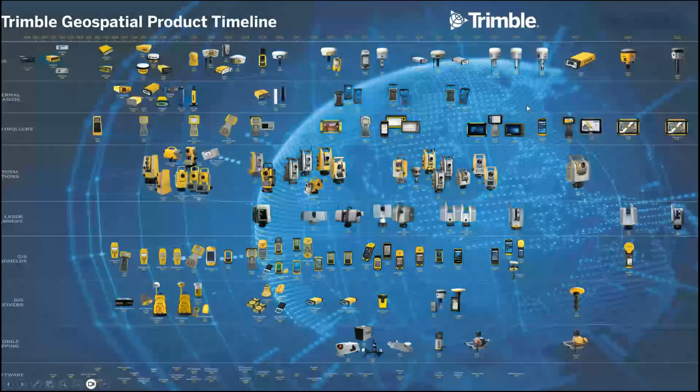This is what the Trimble Geospatial product timeline looks like for the last four decades. It's actually 30 years in 2024 since Trimble released the first commercially available RTK receiver back in 1994 - it was 5Hz at the time. In the last 5 years, Trimble has continuously developed and released new hardware at the rate of almost literally one a year, accompanied by field controllers and other bits not GNSS related. So it's quite a long history of development, knowledge, and experience in this space.

I thought it would be a good idea, because sometimes I get customers just accepting the button-pressing operation of basically every bit of surveying technology, not really understanding what's going on in the background. So apologies if some of you are well versed with the theory behind it - for those who are not, allow me 60 seconds to go over this.

What is GNSS? It's an acronym for Global Navigation Satellite System, which effectively comprises 6 independent constellations managed by different countries, or in the case of Galileo, a union of countries.

Why does it matter? When I first started this 25 years ago, we only had GPS to work with - they had about 21 satellites at the time. At any given point during the day, I'd have access to 5, 6, maybe 7 satellites with any luck. It was difficult to measure points even in easy conditions. But we need a lot of satellites to measure more points so we can triangulate our position better, which is why we now have basically 4 times the amount of satellites we had 20 years ago. So at any given point in time, you'll have 20-plus satellites to work from across different constellations.

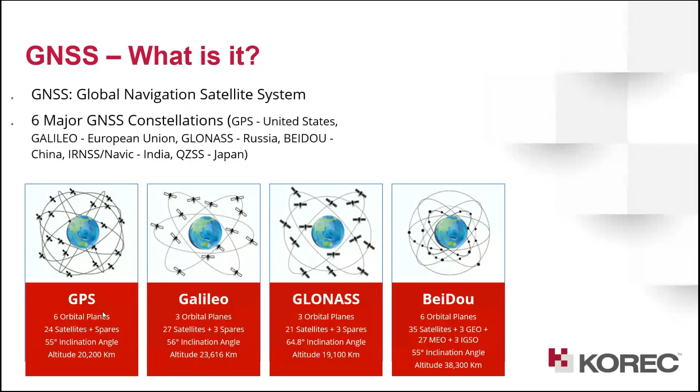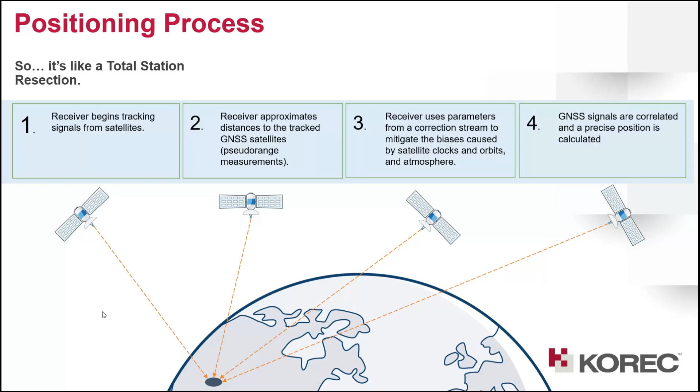How does the positioning process work? For you to figure out your position anywhere on the planet with what we call in the industry autonomous precision - accuracy anywhere between 3 to 10 meters - we get signals from the sky. I like to explain this in total station terms, since a lot of people are more familiar with that. So it's like a total station resection - I used to call this trilateration - but where the baselines are actually in the tens of thousands of kilometers to your satellites, and the control points, i.e...

The satellites are moving at thousands of miles per hour, and it's still very much impressive that with all of this, we're able to get, with no additional help, an autonomous position with an error of just a few meters anywhere on the planet.

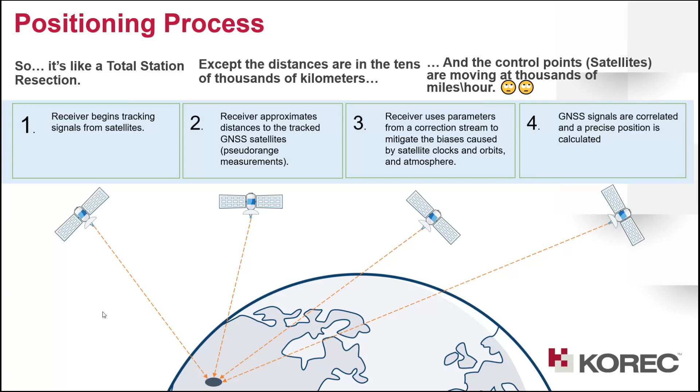If we want better, essentially what we have to do is pick a known, fixed point in space, which we'll call a base. That base will have an error to the autonomous positions, and we'll differentiate that error to the rover, which we call our corrections. Those corrections, in the case of a base and rover system, which we call traditionally RTK, are then transmitted by radio to a rover to enable you to get centimeter level accuracy.

Trimble VRS is a positioning process concept based off RTCM, a worldwide standard, which is how you get those corrections. I'm not going to get into the mathematics about it. By the way, spoiler alert, we're planning to do another webinar purely focusing on the mathematics and the whys of VRS and other bits and bobs in a couple of months directly with Trimble, so we can drill in a bit more on these specs and technicalities.

But for now, RTK on a real-time network means you get your corrections from a network by mobile internet signal. VRS is a technology that Trimble has acquired and has been continuously developing since 1998, so it has almost 30 years of development into it.

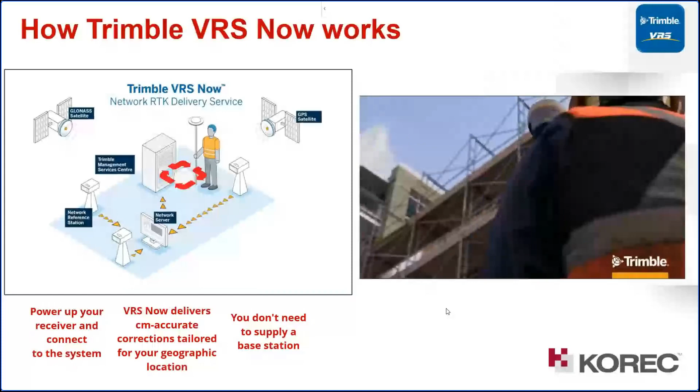Virtual Reference Station Technology, or VRS, pioneered by Trimble over two decades ago, remains a proven, cost-effective choice for any real-time GNSS survey application. Trimble VRS Now Correction Service provides surveyors with the power to just connect, correct, and measure, all with the peace of mind of around-the-clock network monitoring, always delivering the reliability your work demands. With continuously evolving global constellation systems, we have more satellites available for your real-time correction stream than ever before. Using the newest constellations gives you increased reliability and more robust service. With Trimble VRS Now Correction Service, buildings, trees, even hills are less of a challenge, resulting in more robust, accurate data and less vertical error. Trimble VRS Now is a network RTK service that eliminates the need to set up your own base station, simplifying job site logistics and eliminating capital expenses. You get the job done quickly, the first time and every time. Let Trimble VRS Now harness the power of satellites to give you the real-time precision you need. Less setup, more time measuring, and the around-the-clock peace of mind that Trimble is monitoring the network so you have real-time data always. Accurate, dependable, easy. That is Trimble VRS Now.

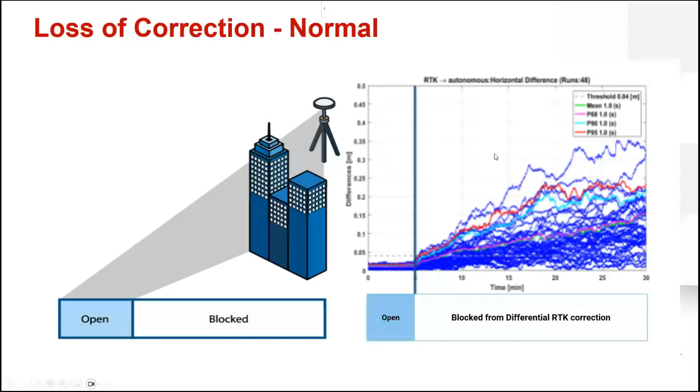If you have access to this precise positioning service, which we call xFill in the Trimble gear, the software on the controllers will automatically switch to this correction service, and there are two flavors in which it will happen. I'll circle back to that, but it was developed so that you have positioning insurance against drop downs in your mobile internet. It will carry on with the same level of accuracy as VRS up to a point, then degrade a bit, but there's a limit to how it will degrade, and it will still maintain what I call an RTK level of correction.

The xFill correction service comes in two separate flavors. One is limited to 5 minutes: whenever your base station correction by radio or VRS connection by mobile internet drops, it will automatically flip to xFill for up to 5 minutes, and you'll see that happening on screen. When the correction goes down entirely, you'll see it drop. The other version is always on, so it doesn't matter how long you go without internet, the system will be continuously on.

Why is that important? Basically because it avoids downtime. It gives you extra time to measure a few additional points where you don't have to bring out the total station, or if you do need to, it gives you enough time to measure those resection points.

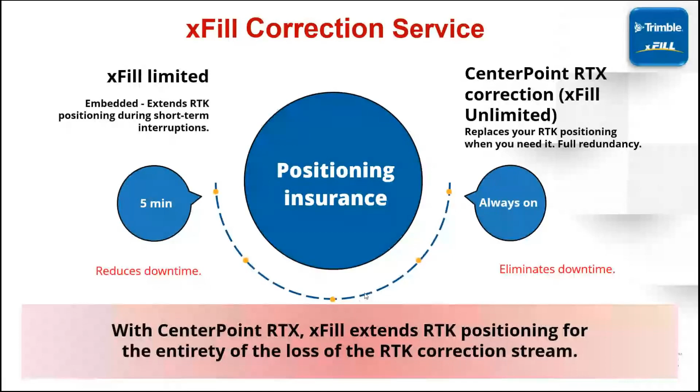We've been speaking with more customers about this feature and learned two things. A lot of our customers were already using this xFill Limited service without knowing. But when we brought it to their attention, they said this is saving us a lot of time, because every time we have to take a total station out, that's like half an hour of our day gone. Using this technology, we don't have to spend that time getting the total station out.

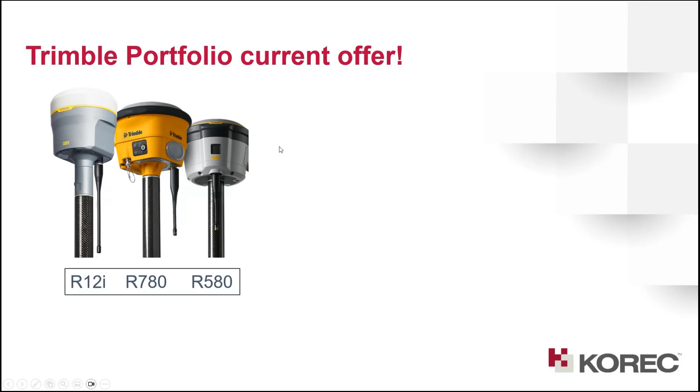The good news, and here's the first offer of the webinar: for our current GNSS portfolio, the 12i, the 780, and the 580, all of them have xFill Limited as standard for up to 5 minutes. So all your Trimble gear will automatically switch to satellite correction if the internet goes down, up to 5 minutes, and it's a permanent feature that will always work on Trimble gear. You don't have to pay extra - it's included as part of the standard offer.

For our VRS users, anyone using our VRS subscription, whether a new subscription or renewal, you can have at no extra cost the unlimited version - it will not be restricted by the 5 minute limitation, if that makes sense. Even if you want just a trial of this independently, give us a shout, we'll sort it out. I'll reiterate, this will only work with Trimble gear, this xFill service.

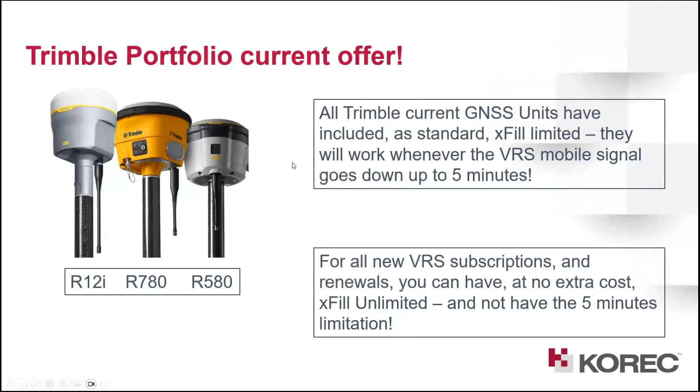Expected accuracies - I'm not going to read the slide, you guys can take a screenshot or watch the recording afterwards, but we always like to check what we get against what's on the data sheet. We know from experience that VRS Now is at this level of accuracy, whereas xFill, the time limited stuff, is as accurate in terms of horizontal values. Vertical is still not quite as good as VRS Now or radio, but in terms of product development, this used to be 10-15 years ago, 10, 15 centimeters horizontal, 30 centimeters vertical - the best we could get.

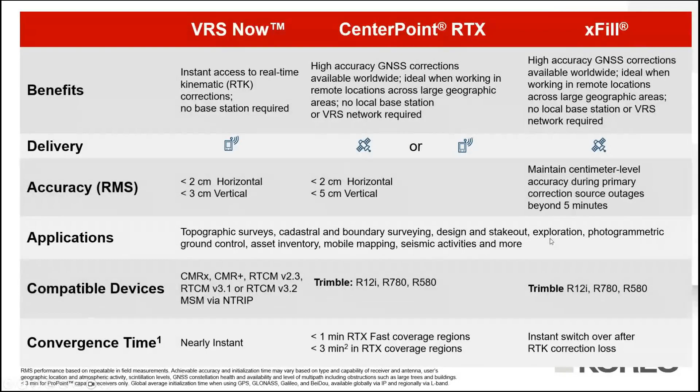Like any other network, this positioning service is based on a worldwide network of receivers. The more receivers Trimble installs over time, the lower these numbers will be, and this is what we've been seeing across the planet. If you have that RTX service in your systems, you can work anywhere on the planet where you have coverage through one of those satellites broadcasting corrections. Yes, there is a way to get to higher latitudes using a different way of connecting to RTX - I'm not going to jump into that now, but if you want me to explain it, I'll happily go through the 101 with you. It's a worldwide service with over 20 years of development, and it's getting better over time.

This might be familiar for you Trimble users - on the R12i controller, whenever it flips between RTK on VRS and xFill, it changes the information you see on screen. This is a simulation, so if this video was taken from a real controller, clicking the world icon and hitting pause effectively cuts off your internet connection.

If you give it a few seconds, you'll see that it flips to RTK xFill, and you can see that it's still maintaining the same level of accuracy. As I said, as standard, all Trimble gear on the latest portfolio will keep this connection going up to 5 minutes, up until which point it will give up, or if you get your internet back, it will resume, which is what we'll do here on the video. So we're going to get the internet connection back up, and you'll see that the icon will change back to the world with the green tick again.

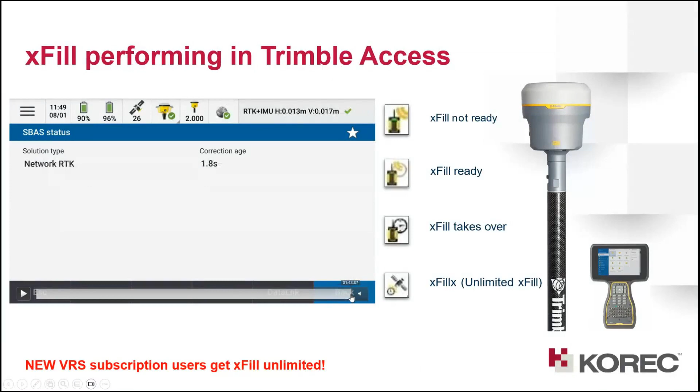You have the satellites, and a few more seconds. I'm going to push this forward. 3, 2, 1, and RTK plus IMU was the last bit. Okay, so world with the green tick.

So the software in the field will inform you on that. We never do anything - you know, I'm old enough to check everything, so I don't really trust implicitly what the controller says, and I know that you guys don't either. So we always check whether what the controller says is actually based on truth or not in reality.

This was actually recently. I've asked one of our specialists, Phil McCartan, to do a couple of screenshots from this controller on the fly. Nothing really professional here in terms of picture taking, but what he did was he resected the total station from a few GNSS points. He measured a couple of points with the total station, then flipped to this precise positioning service, RTX, and staked out that total station measured point. You can see that the vertical accuracy is 30 mil, but then it's saying that the real vertical is 43, which kind of goes in line with that 5 centimeter absolute accuracy that was stated in the service. But the horizontal accuracy is pretty much bang on where it should be. So I'm happy with that.

He did the same, now measured against a VRS measured point without the IMU, without the tilt function on. That is the simplest way of comparing, and yeah, this is very acceptable to me.

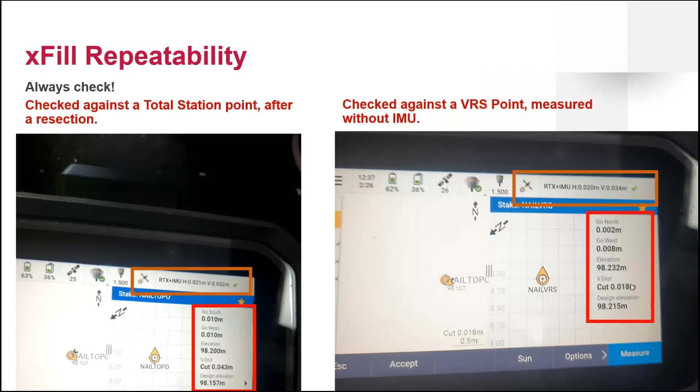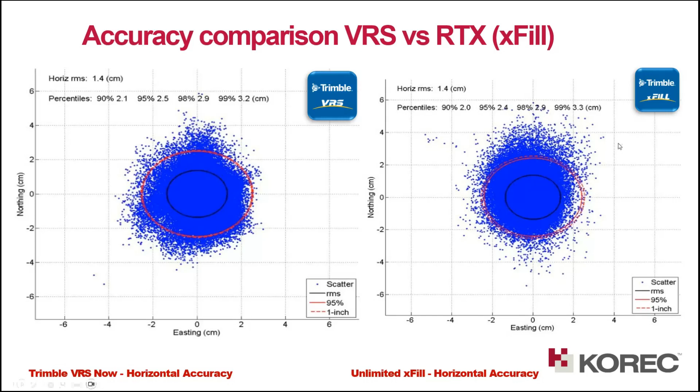Hopefully that makes sense. If there are any questions or whatnot, just throw them in the chat window. Trimble tests these technologies over and over again - that's a dispersion of points, of hundreds of points measured between both systems, VRS and xFill, just to prove that the horizontal accuracy is essentially the same up till that 5 minute mark. You guys will be fine using the service. Vertical will degrade a bit more after those 5 minutes.

You might remember from my previous webinar about laser scanning - this is what a Trimble laser scanner used to look like 20 years ago: heavy, convoluted, targets, cables, batteries, all sorts of things that you have to bring with you to site. But again, through miniaturization and increasing processing capabilities, everything is much simpler and faster now, and everything is contained in a really high powerful tablet that you bring with you to site. So this changed the way that people work and enabled a lot more people to access the laser scanning technology.

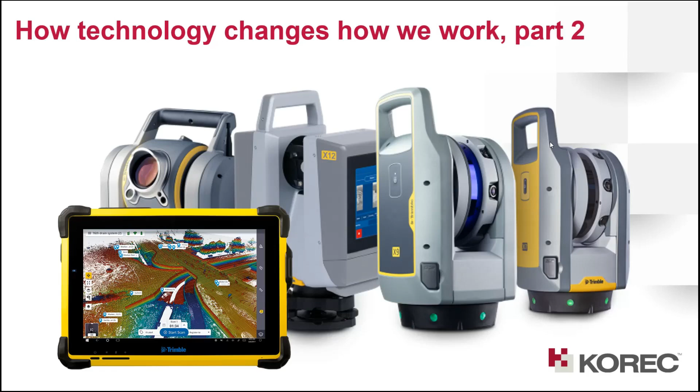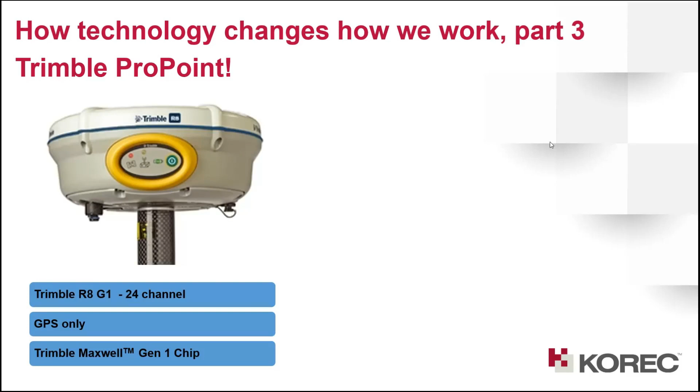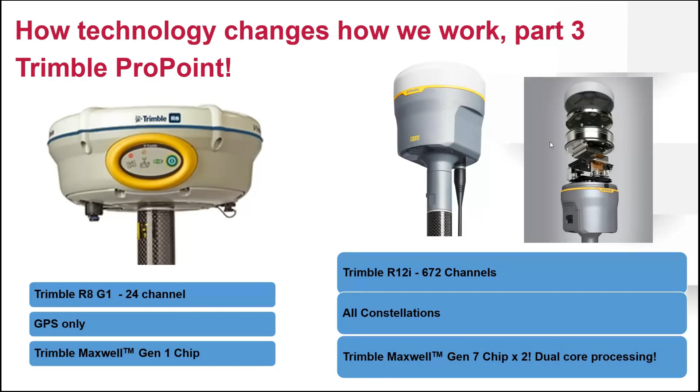Trimble ProPoint is our trademark technology on our GNSS kit, which essentially did the same. I remember when I started working, Trimble had an R8 first generation. There were only 24 channels there, it was only tracking the American constellation, and we were up to the first generation of the processor on board, the Trimble Maxwell chip. Whereas now with the R12i, we have two 7th generation Maxwell chips, which enables the R12i to have dual core processing, which, like a computer, enables the system to compute mathematics much faster and much more reliably. And we're able to track all 4 constellations as a standard on that unit.

What am I going to do? Well, we know what we will do. We will figure out a way with a total station or what have you. But it was always kind of disheartening. Whereas now, through the improvements of technology and how Trimble is able to filter out signals and compute best mathematics and increasing processing power, which is the hardware improvements in the actual unit itself, we're able to sort those

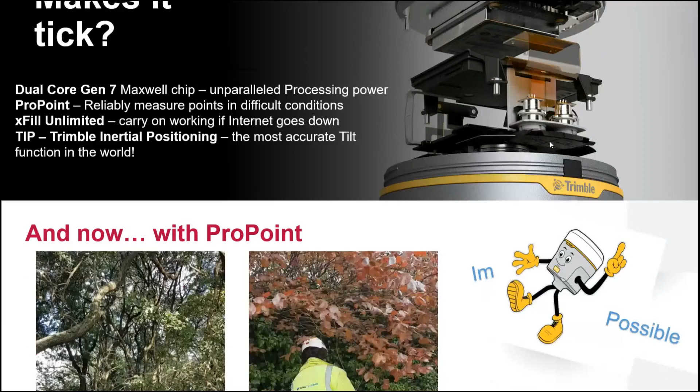difficult measurements on the canopy or buildings a lot better. And including all of that technology, combining the sensor fusion within the R12i, with the ProPoint, with the xFill, with the tilting technology, we're able to do stuff like this, where you can get underneath a canopy and get real proper accuracies underneath it.

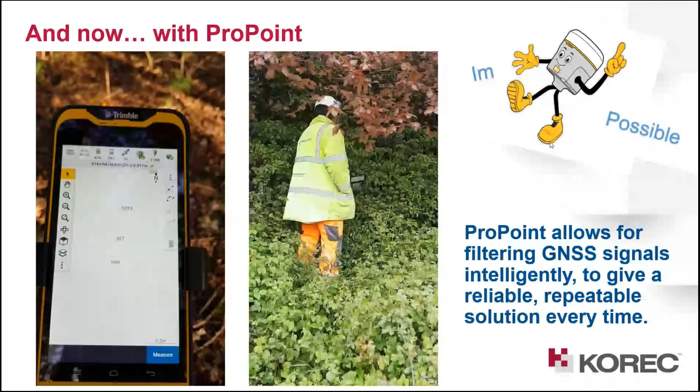It's not just about, for me, the ability to measure things on the canopy, it's that if you take the system out of that canopy and go back again and take that point, you're going to get the same result. Repeatability is paramount for Trimble. Repeatability, reliability, these are the cornerstones, the foundations upon which Trimble GNSS has been built over the course of the last forty years, basically making the impossible possible.

So you can get out of sight now, laughing with a smile on your face. I have a feeling this slide will become a meme at some point.

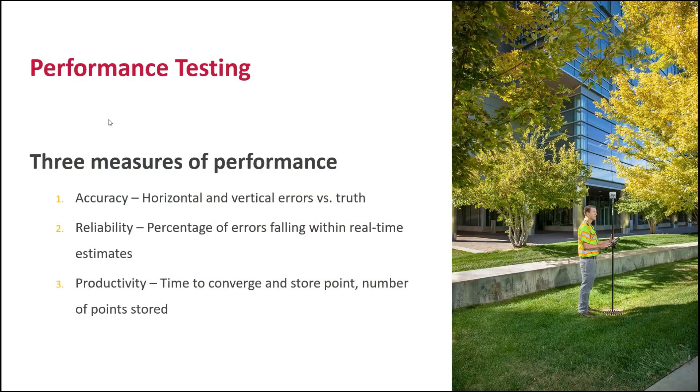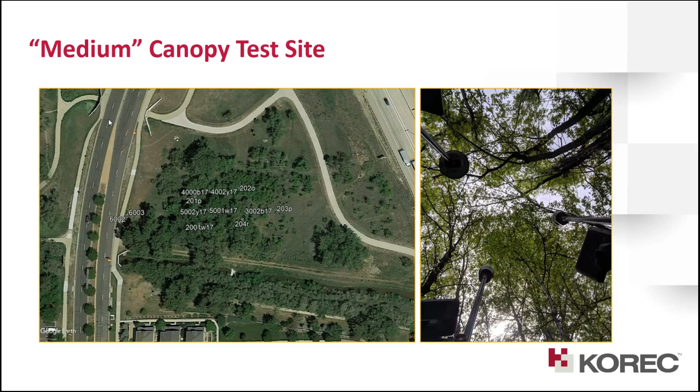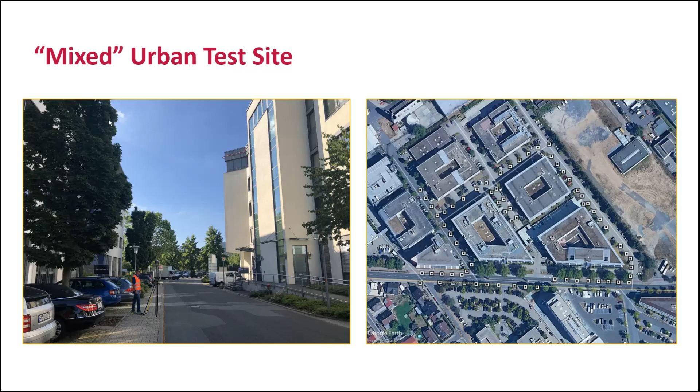As I said, testing is what makes customers trust Trimble GNSS. So this is just a few slides to explain that before the ProPoint technology was officially released to the market, this is only a very small fraction of the tests that Trimble did with the system in different sorts of conditions - canopy, partial. I'm going to skim through these slides just to say, yeah, mimic different situations, different conditions to test things other than being able to measure a point underneath canopy or close to buildings.

So this is the value in ProPoint, making sure your topo surveys or control points measured are correct. If you want to have a look, I have another 20 different slides just with the rest of the results from those tests, which I'll happily share if you reach out to me afterwards.

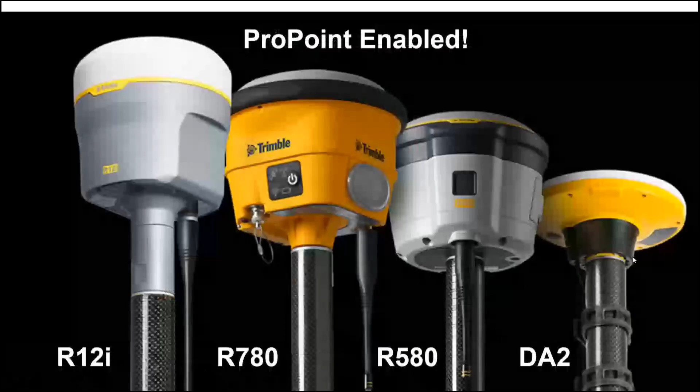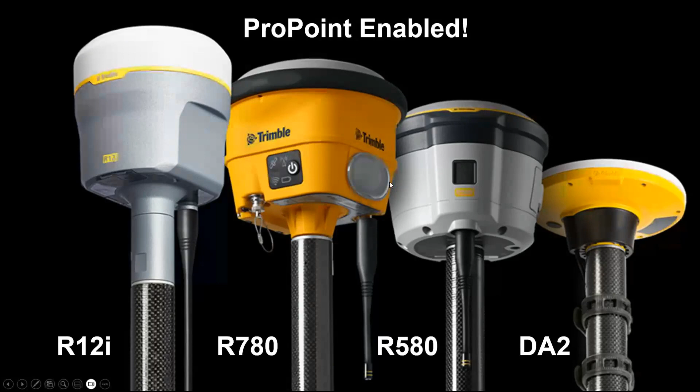So all of our current portfolio is ProPoint enabled. All of them have that technology. They will all work essentially the same. For the discerning eye, you'll notice that the R12i will be a bit more accurate and a bit faster because of the dual processor, the dual Maxwell chip that it has on board. The other ones have just one chip. I say just the one - they're still pretty great. I know we're talking about improvements of 2, 3, 4 mil every now and then that you'll notice on your measurements.

So yeah, this is the main part of the portfolio. The R12i is what we call our premium solution, the all-in, all bells and whistles option. There's no options on the R12i - you'll get it with standard, all constellations, base and rover ready to broadcast, tilting technology all ready to go. Whereas the other ones - this one is scalable, and the 780 is a scalable unit, I'll tell you about the options in a second. And the 580 is what I call the best value, the one with the best return on investment, meaning if you invest in it you're able to get your return a lot faster.

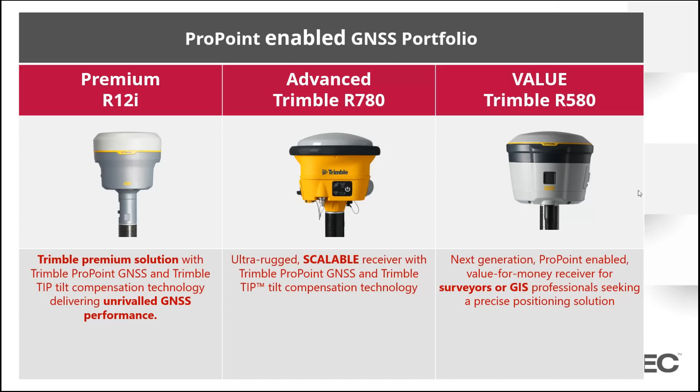And it's the one that we, as KOREC, also sell for both the survey and GIS market, because it's able to cope with different controllers for survey and for GIS, and with different software as well, things like TerraFlex or Esri or our own K-Matic software on controllers.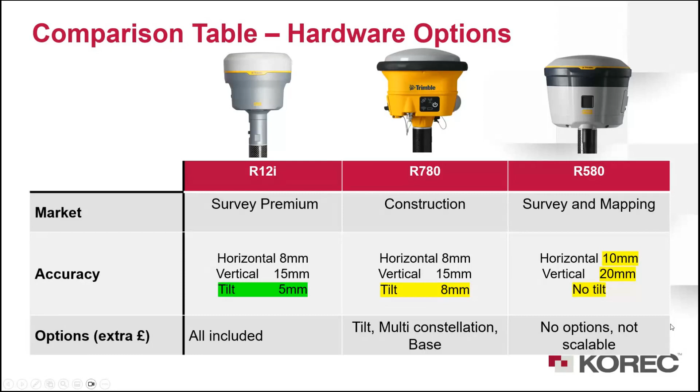If you remember this, yes, people were really serious about software should make their own hardware, and Trimble does so for the GNSS as well and for the controllers. Why? At the risk of repeating myself, it's the same reason Trimble makes their own hardware for laser scanners: to make sure the communications work properly - the Wi-Fi, the Bluetooth, the software on the controller which Trimble also develops - to avoid things like data corruption and downtime, waiting for the Bluetooth connection to kick in or resume, or when you're trying to switch between total station and GNSS, it takes time.

Sometimes it doesn't work, you have to restart things. Trimble doesn't do any of that, for almost 20 years. I cannot remember the last time I had a Bluetooth problem with any Trimble kit. It just works, which is probably the main thing any Trimble GNSS user anywhere on the planet will comment when asked what they think about Trimble GNSS.

That's always, without fail, the first tagline. Speaking of controllers, there's a huge legacy of field controllers in Trimble - developed and supported by Trimble. This is already out of date, this picture is already out of date by 3 years, because after this there was already a new version of the TSC7 released in 2023. Looks the same, but has a different processor, more memory, more powerful. So yeah, just keep on updating all of these controllers, and this is just the ones that have a keyboard on them - I'm not counting the tablets and the ones that don't have a keyboard.

Continuous development - why? This is the latest version of the controllers that we sell here for total stations or GNSS. Why is Trimble continuously updating their controllers? Well, one, because it's just the way to give back to the market something that's up to date. And secondly, so that when you invest in one of these controllers, they last you for the whole lifetime of the product without you feeling that things are getting slow over time, or that it's getting outdated over time.

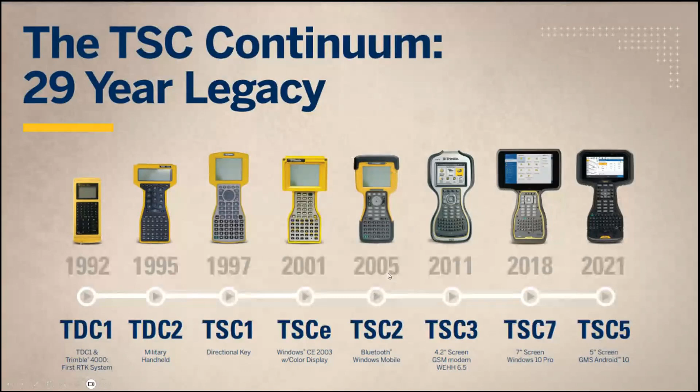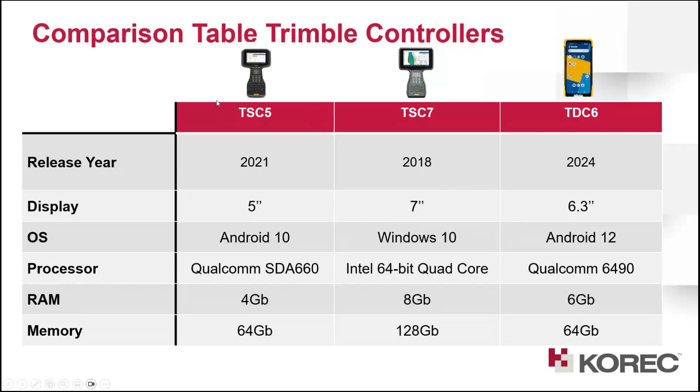Don't limit yourselves to controllers which have not been updated in the last 5, 6, 7, 8, 9, 10 years. Go with something that works, Android-based. There's nothing else like that anywhere on the planet for a controller supporting Android.

Also, if you're in the construction space... apologies, I was thirsty.

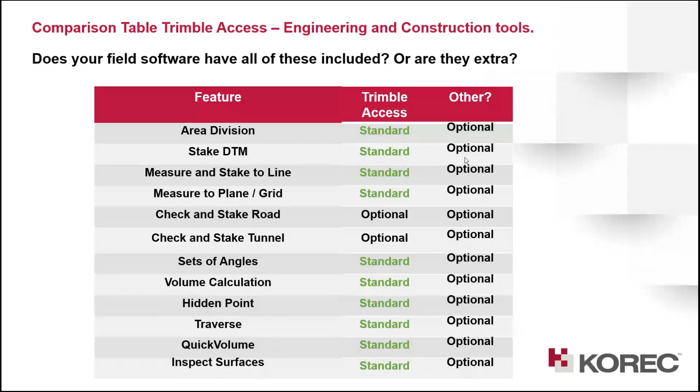You need to think about what tools you need to bring with you to achieve your tasks. Trimble Access has all of those features included as part of the standard package, whereas other software you might have to pay extra for. Trimble has this almost 40-year-old mentality of let's just give the people what they need to work, because that releases pressure on the customer and enables them to be more productive. You don't have to think whether you'll be able to achieve a task or not, because that's already included in the software. So bring value to the customer by giving them what they need.

Also, as part of our KOREC remit, we have to work locally with different third-party software providers to make sure that workflows work from the field to the office, in case you're not using our office software. And the fact is, in the UK, most companies are using third-party software anyway. So we just need to make sure we are engaging with these providers, and they happily speak with us to make sure things work.

A good example of that is recently, Phil Langridge from n4ce. They've included a feature in their software which enables them to seamlessly connect to our cloud-based data transfer and collaboration system, Trimble Connect. So what that means is you can do a traverse with your Trimble total station on site, upload the data seamlessly over the cloud to n4ce. An operator in n4ce can process your traverse data, get your adjusted reduced coordinates done, and then upload that file back to the user in the field. You get a little notification, please download your driver's data, and off you go. No muss, no fuss, nice and seamless workflows.

Whereas if it's a manufacturer that is getting a controller from a place, a software from a different place, a correction service from a different place, and something goes down, who are you going to call? I've been here before, and what happens is the customer then ends up calling 2 or 3 people and waits for answers and then gets frustrated. Maybe you save a bit of time buying a different product, but then challenges with support suck all of that time away, and you're losing money at the end of the day. So always test.

It's fine. Always test your GNSS before investing. It's not enough to be able to measure a point underneath canopy - it needs to be repeatable. We usually encourage people to challenge us, to measure our points against total station measured points, to measure against your own kit. Repeatability - always test before investing.

The last thing we want is for you guys to invest in a system and then it doesn't provide the results that you are expecting because it was a bit cheaper. This is not how we roll. We welcome that challenge.